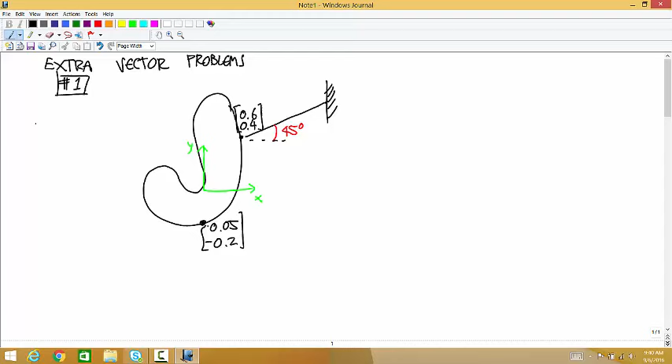And the first question is, if the cable has a tension T, what's the force vector the cable applies to the body? So what's the force vector applied to the body by the cable if the cable tension is T?

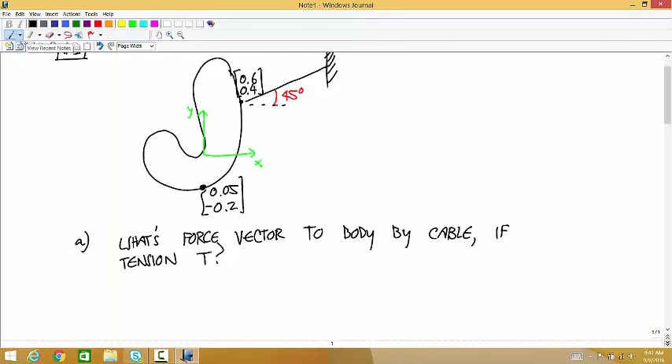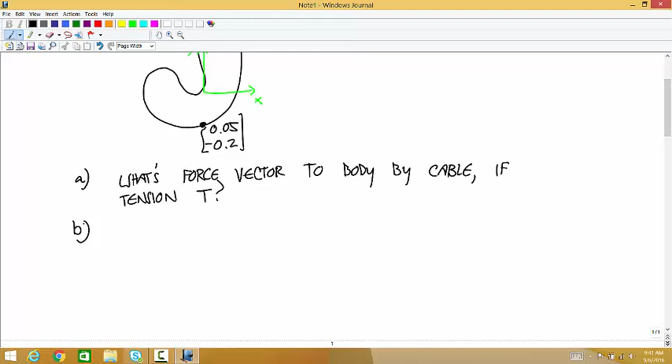And then the second one, well, the second one is the vector from the pin to the point where the cable connects to the wall. So I'll call this point W, I'll call this point P. And we want to figure out the vector to W from P.

To figure out the force vector applied to the body by the cable, we know the tension is T, so we're going to multiply that tension T by a unit vector in this direction. The only thing we don't have is a unit vector pointing away from the body at 45 degrees from the horizontal.

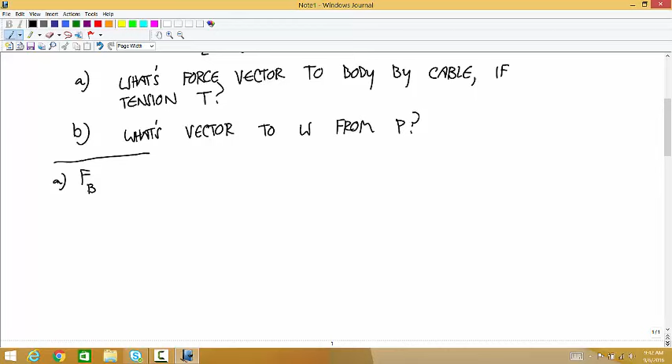So for part A, the force applied to the body by the cable is equal to T times cosine of 45, sine of 45. That's 0.7071, so this just gives you 0.7071 T, 0.7071 T. Any questions about the first part?

And then the second part, we want to figure out a vector that goes from P to W. So we're trying to figure out... I have a question. Yep, sure. Is there a reason why you didn't use the 0.5 meters in your calculation?

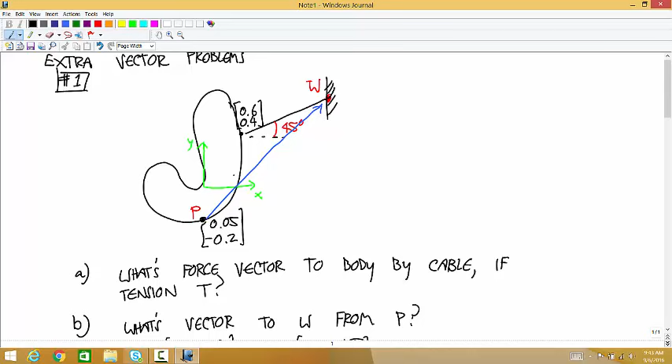We're going to use it in the second part, but what we wanted to do was, the only reason that cable was useful at all in part A was we know that the force applied by the cable is parallel to the cable, pointed away from the body. So we know we want a unit vector that's parallel to that cable, pointed away from the body. And so that half doesn't come into calculating a unit vector. That could have been any length.

And what you could have done, the long way around, if you hadn't seen that from the start, you could have said, okay, the vector from here to here is 0.5 times cosine and sine of 45, and then take the unit vector of that, and you realize, oh, I just divided that 0.5 back out. Okay, well, so that works fine too.

Okay, so for part B, we want this blue vector. So we have the coordinates for P. We need the coordinates for W.

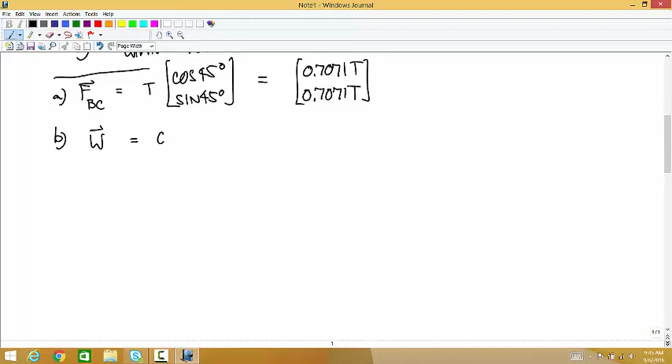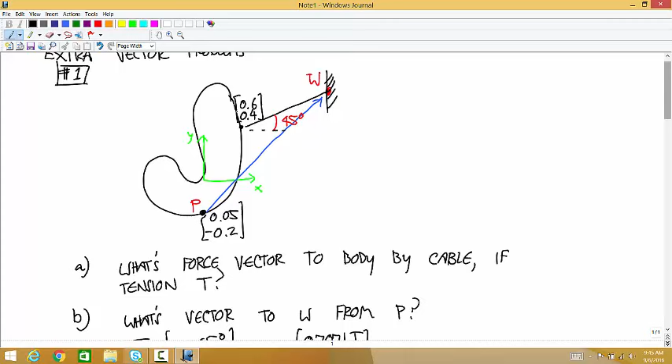So the coordinates for W are equal to 0.5 times cosine and sine of 45 degrees, plus the coordinates of this point, 0.6, 0.4. Okay, let me draw what's going on there.

So if we're trying to come up with the coordinates of W, okay, that's the orange vector. The way we're going to do that is we're going to add a vector that goes from the origin to here to a vector that goes from here to the wall. The vector that goes from the origin to this point is already given, that's 0.6, 0.4. And so now we just need to figure out that remaining black vector.

I guess I'll draw that as purple too, and then we're just going to add those two together. It's just vector addition.

So this is 0.3535, 0.3535, plus 0.6, 0.4, is 0.9535, 0.7535.

Would you have to have a distance from P to the origin too? From P to the origin, we already have that given as coordinates, so we don't have to figure that out.

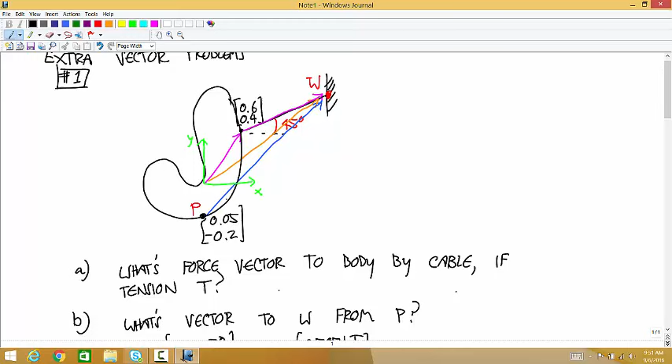Guillermo, you have a question? Mm-hmm. Okay. Well, okay.

This one is pretty hard to draw. Let's see, why don't I insert it here?

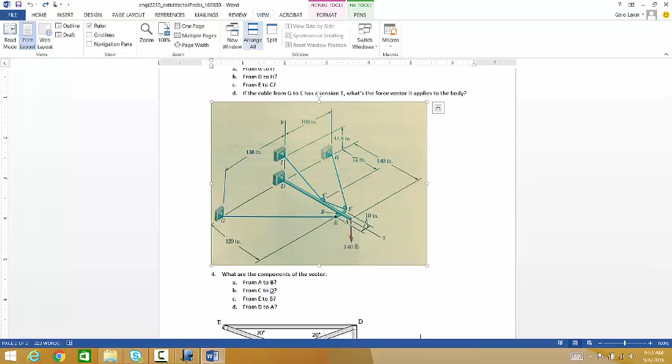Okay, well, let me just do it on the - let's look at it up here. All right, so we have the x-axis going this way. Oh, no, we don't. Okay, start over again. We have the x-axis going this way.

And the y-axis, that axis, comes all the way back to there. That's the origin, with the y-axis going this way. And the z-axis is going this way.

For each one of these points, I think the easiest way to do it is to start out by figuring out the coordinates of all these points, and then you can do the subtractions. Let's just figure out a couple of these since we're here.

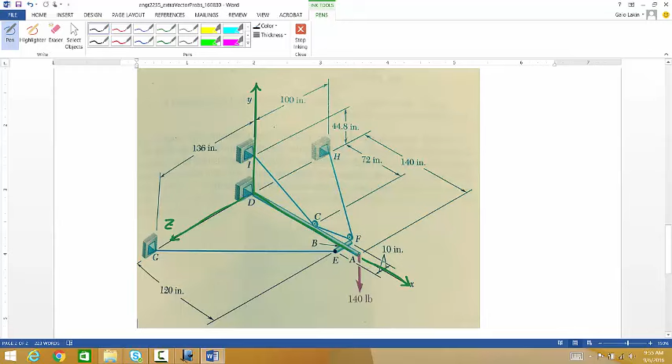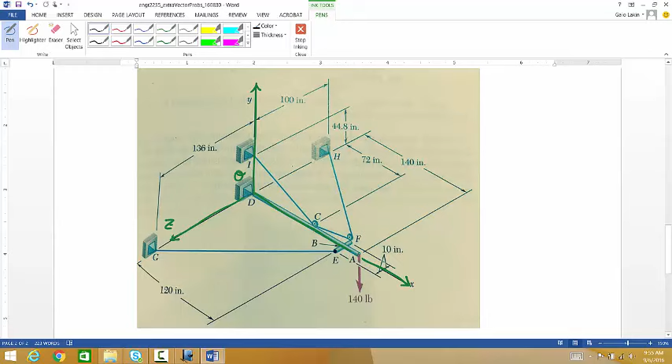So the coordinates of H. H is just, so if this is the origin at D, to get to H you just go a total of 100 inches in the negative z direction. So the coordinates here are 0, 0, negative 100. This is in inches.

For that point I, to get there, you're just going from the origin 44.8 inches in the positive y direction. So 0, 44.8, 0. Any questions about either of those?

G is just in the positive z direction, a total of, well I covered it up, but I think that says 136 inches. So that's 0, 0, 136.

Let's do, so these are all just going along a single axis, but now we have to do a couple where you're going along multiple axes. So let's say the point F. To get to F, you travel from the origin along the positive x-axis until you get to B. And then from B, you have to go 10 inches in the negative z direction to get there.

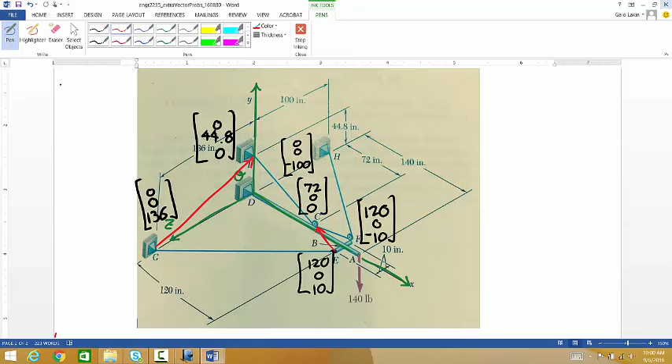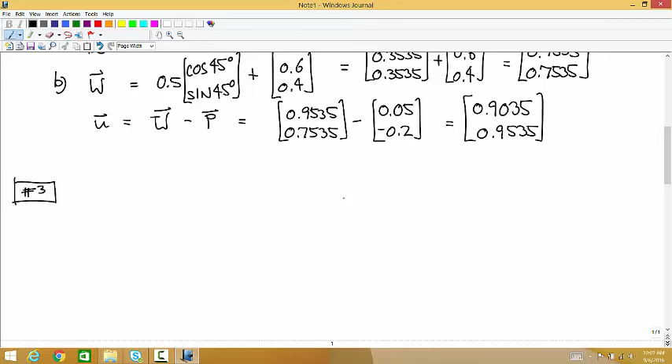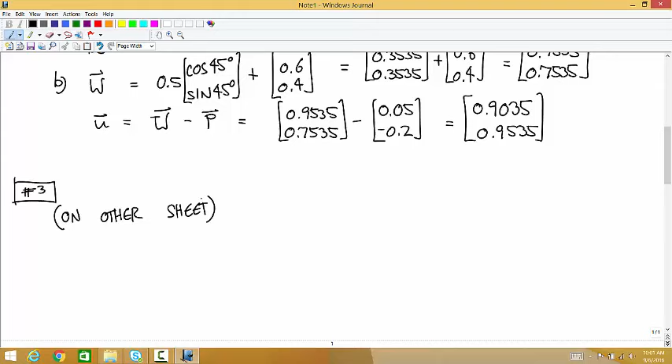Okay. All right. So I was going to do an example problem.

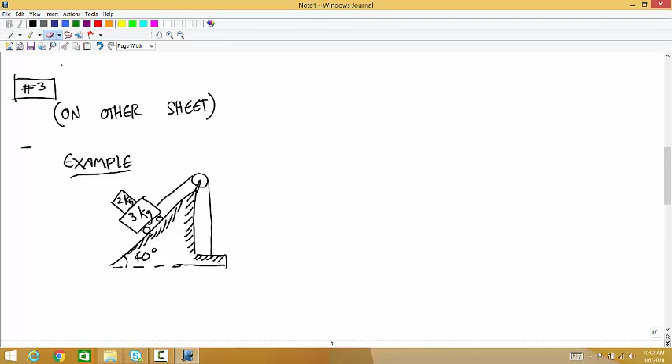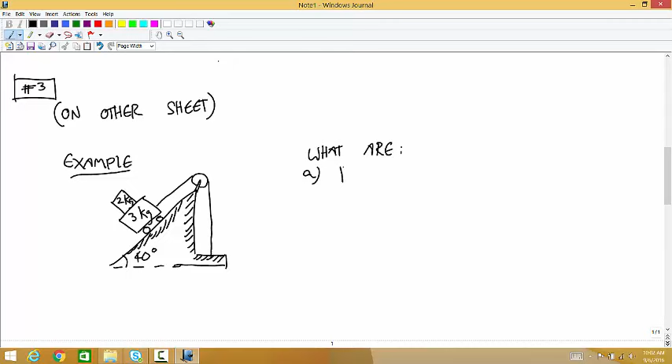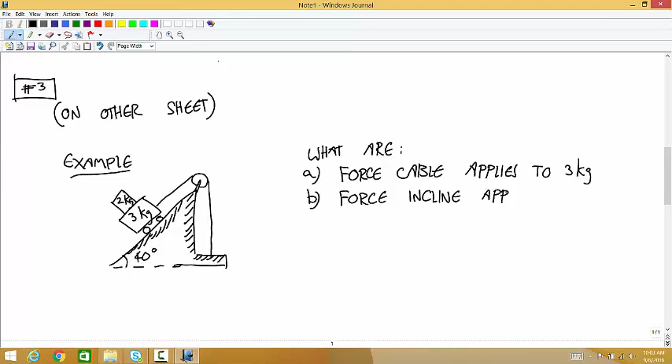And we want to figure out, I don't remember what order I said before, but let's say the force the cable applies to the 3 kilogram box, the force the incline applies to the 3 kilogram box, and the force the 3 kilogram applies to the 2 kilogram.

We're going to have to isolate two bodies. You kind of have a choice. You could isolate the two of them together, or you could isolate the two of them together and then isolate one of the individual ones, or the two individual ones. But either way, you're going to have to use Newton's second law twice. Let's just isolate the two boxes.

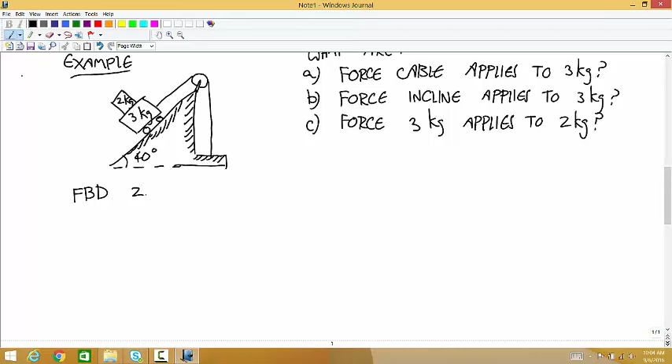So, free body diagram of the 2 kilogram box. There's the outline, then there's the weight force of 2 times 9.81, and then this is a friction contact. So the only place that the outside world makes contact with the 2 kilogram box is here. That's the force on 2 by 3.

And Newton's second law says 0, negative 19.62, plus F23x, F23y is equal to zero, because there's no acceleration. And so the force on 2 by 3 as a vector is 0 for an x component and positive 19.62 for a y component.

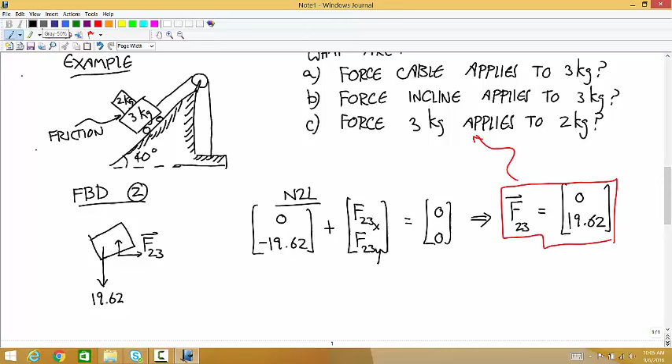And actually, that's already part C. And then we'll isolate the 3 kilogram box.

There's the outline. There's the weight of 3 times 9.81, so 29.43.

Now we're just going around the boundary looking for contact. I'll start at the wheels. What do we know about the nature of the contact between the wheels and the ground? It's frictionless, so that's a pushing contact. It's perpendicular to the surface toward the chosen body, or it's just a normal force, like you've done before. I'll just call that N.

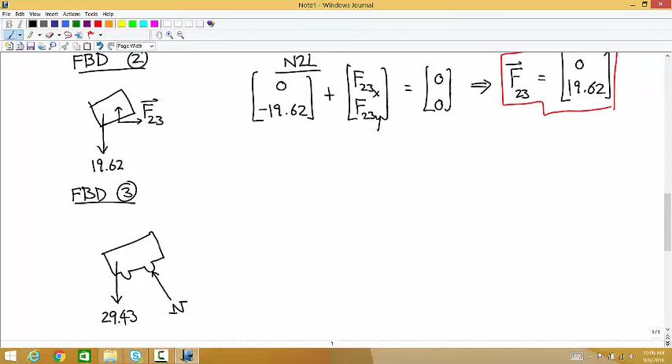Keep going around counterclockwise. We get to the contact between the body and the cable. What do we know about the nature of that contact? Yep, parallel to the cable, away from the body, like that.

Then we get to the top. The top touches the 2 kilogram box. What do we know about the nature of that? Yeah, that's right. That's the force on 2 by 3, which is negative F32. Actually, no, what I wrote here is wrong. This is the force on 3 by 2. It's negative F23. And we already calculated F23, so this is equal to 0, negative 19.62.

Why is the force pushing up if the force on 3 by 2 -- why is it going up instead of downward? Why did I draw it like that? I just drew that to say, when I draw it like that, all I'm saying is the sign convention says a positive x component means that way, and a positive y component means that way. And then the value of the y component is negative, which means that really that force is acting down. So that's just showing a sign convention.

But that's important, because if you instead drew this as going down, and then wrote this is 19.62, that would be saying you have a unit vector down times a constant of negative, which would be a double negative, and you'd really be saying the opposite of what you mean. So your forces go in as vectors -- you always need your unit directions to be in the directions of the axes. When you know the directions of those components, don't use that to adjust the directions of those axes.

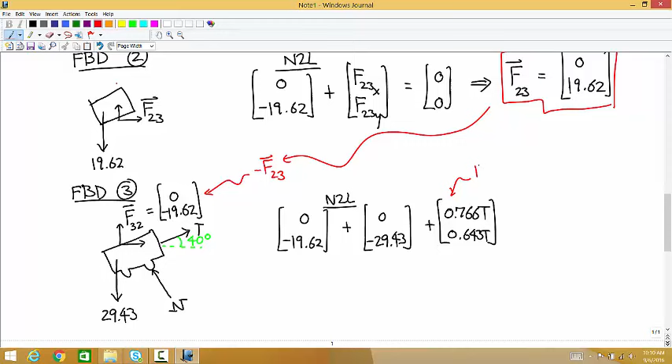plus, now we have to do some stuff with unit vectors. So what do we know about these directions? Well, this one is probably the easier one to see. This is just an angle of 40 degrees. So this force is going to have a magnitude of t times cosine and sine of 40, which is 0.766 t, 0.643 t. So cosine 40 t, yep, that's right. This is t times cosine of 40, sine of 40.

And now we have to figure out the angle for n. I think the easiest way to do that is to think of n as just being perpendicular to t. So I'm going to just take the tail of this vector n, tail of this one, and then imagine my coordinate system in there like that. So we go plus 40 to get to t, and then we go another plus 90 to get to n. So 40 plus 90, 130. And so this is going to be n times cosine of 130, which is negative 0.643 n, positive 0.766 n.

Okay, and this one comes from n times cosine and sine of 130. And that's everything.

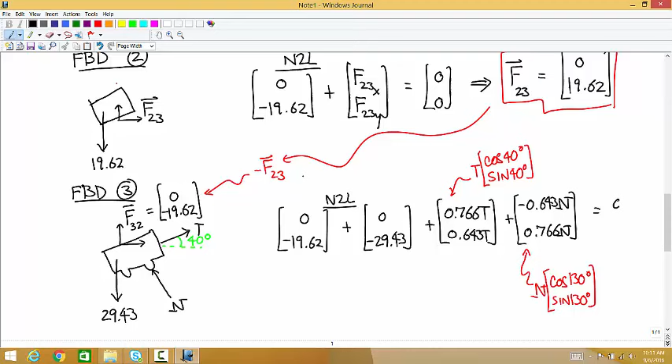So this gives you two equations. The first one says 0.766 t minus 0.643 n is equal to 0. And the second one says 0.643 t plus 0.766 n is equal to -- what's that, 4... Oh yeah, right, 49.05. Okay, so that's a system of equations we need to solve.

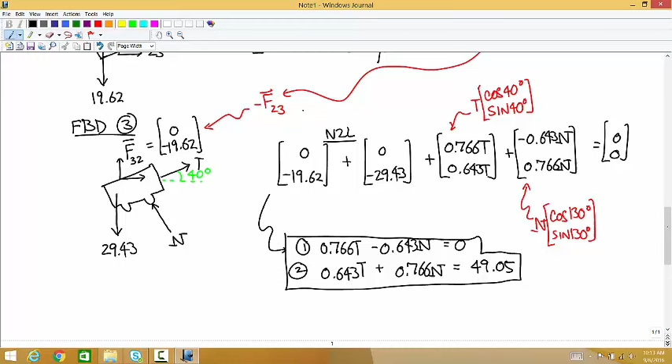So how do we solve that system? Well, that's a small system -- it's two equations for two variables. There's a million ways you could do it, substitution or whatever. But systems of equations are going to be a big thing in this class, and sometimes the systems are going to be as big as 20 by 20 or so. And if you have 20 by 20, then substitution is kind of out of the question -- you're just not going to do that. So the way to do this...

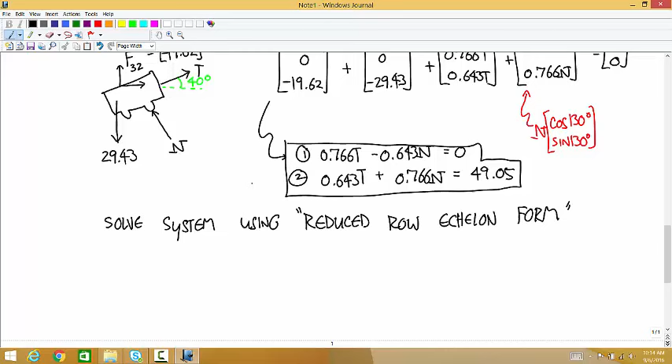So we're going to solve this system using reduced row echelon form. You either have taken a class where you had to learn how this works, or you will take a class where you have to learn how this works. Me too, but I have no idea anymore how it works. I just plug it into a calculator, and that's all you have to do in this class.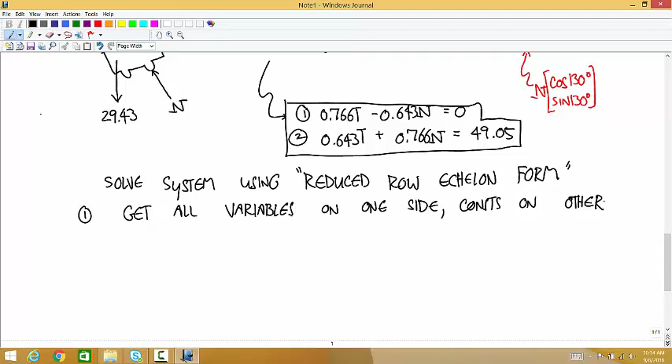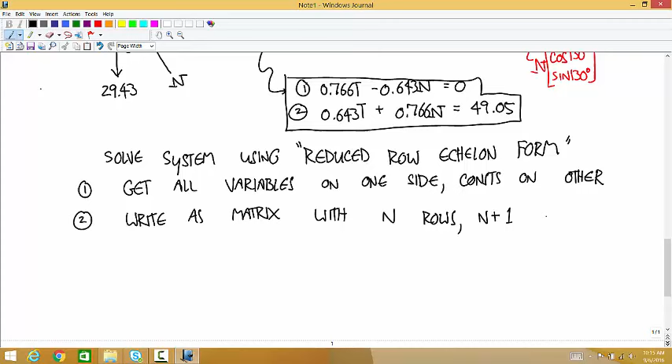So the way to do that is, first, get all variables on one side of the equation and all constants on the other side. And I did that. Second, write it in the form of a matrix with n rows, n being the number of equations, and n plus 1 columns. And so in our case, it's going to look like this.

Okay, so we have a system of two equations and two variables. Our first equation is this row, our second equation is this row. Our columns represent the variables: the first represents t, the second represents n, and the third represents the constants.

Now we're going to go through those equations and write down the coefficient for each variable in the appropriate box. What's the coefficient for t in equation 1? 0.766 for n, negative 0.643, constant 0. For equation 2, the coefficient for t is 0.643, for n is 0.766, and the constant is 49.05.

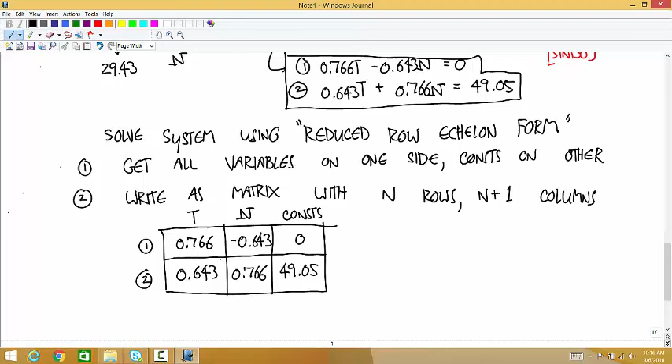Your different calculators have different ways of entering this matrix, so if you can't remember how to do that, figure it out or come talk to me and we'll get it programmed in. Once you have that programmed in, you're just going to run the function. Let's say you call this matrix M. Now you're going to run the function RREF on M.

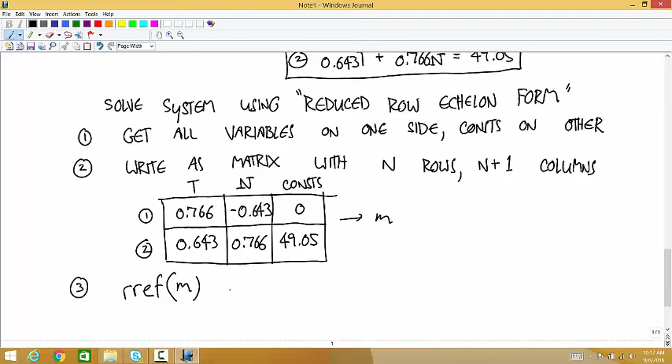It is going to give you a matrix out that has the identity matrix in the first two elements of each row. Then the third column is going to give you the answers in the order that you have the variables. So this answer is going to be the answer for t, and this one's going to be the answer for n.

Can someone punch that in and give me those two values? 37.57? Okay, so that's your answer for t, and that's your answer for n. It didn't save really any time to do it that way for two variables, but when we get to 4 or more, it'll save a lot of time. And when we get to 20, it'll save you a day.

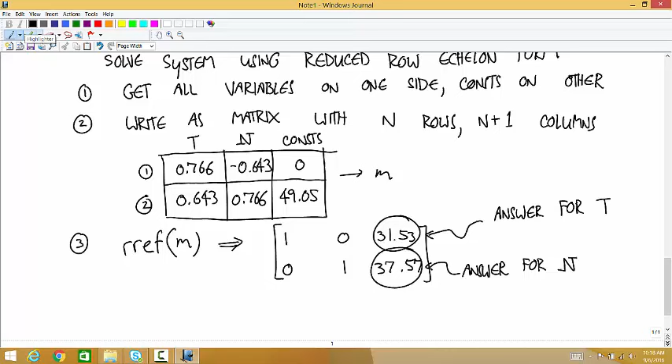Okay, well we solved the system, but we haven't actually answered the question yet. The question asked for the force, meaning the force vector the cable applies to the 3 kilogram cart. So how are we going to get that? Well, this vector here in Newton's second law is the force vector applied to 3 by the cable, and this vector is the force on 3 by the incline. So all we have to do now that we know the values for t and n is plug them back into these vectors, and it'll give us those force vectors.

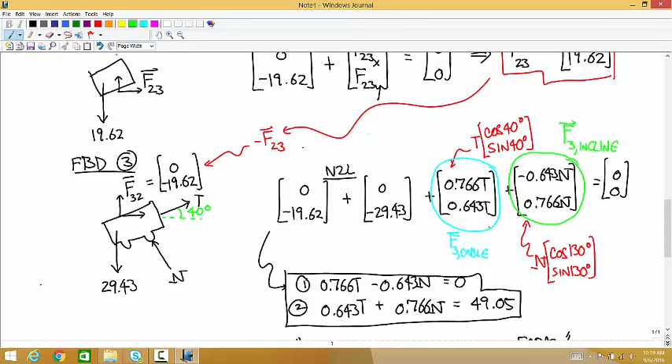So the force on 3 by the cable is equal to 0.766 t, 0.643 t. Can someone multiply 31.53 times 0.766 and 0.643? 24.152? Okay, and 20.273. So that's the force vector applied to 3 by the cable.

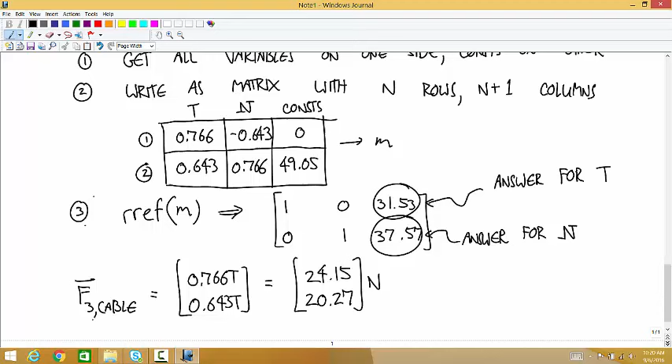And then for the normal, the force on 3 by the incline, that was equal to negative 0.643 n, positive 0.766 n, right? I think so. Yes. So now multiply that unit vector by n, and what do you get? Negative 24.16, and 28.78.

Okay, so if this problem had asked for the cable tension, you just give that value T. If it asks for the force, it should specify. If it asks for the force vector applied to 3 by the cable, you have to plug that tension back into the force vector to get the components. Same thing with the normal force. If it had just asked for the magnitude of the normal force, the answer would be n, but if it asks for the force vector, you have to plug it back in.

What's the force applied to the cable by box 3? Yeah, the negative of that, because it's Newton's third law. So it would be negative 24.15, negative 20.27. And what's the force on the incline by box 3? If you work for an incline company and you're trying to figure out if your incline's going to break, you need to use the higher quality wicker or whatever on your incline. Again, you just take the negative because it's Newton's third law, so the force on the incline by 3 would be positive 24.16, negative 28.78.

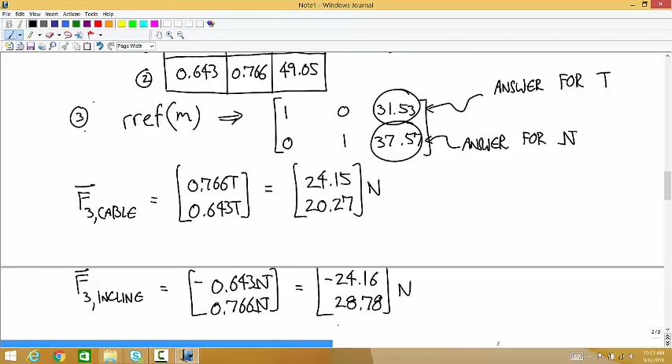So now I'm going to do another example. This one's pretty similar to something you had to do, or will have to do, in your homework. This one has to do with pulley advantage. Some of you heard about this in Physics 1, some didn't, but I'm sure everyone's heard that pulleys are one of the simple machines. So you can use pulleys to decrease the amount of force it takes to lift something. But the first time I saw calculations with pulleys, I was confused, because the pulley doesn't actually reduce the force required, it just changes the direction of the cable force, right? That's all a pulley does. But it turns out that if you use a certain configuration, you can get this pulley advantage effect, and I just want to show how that works.

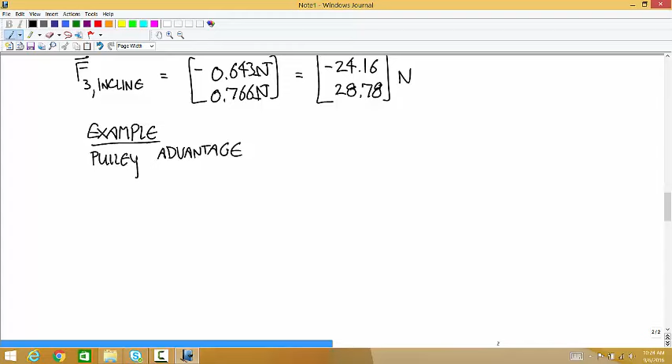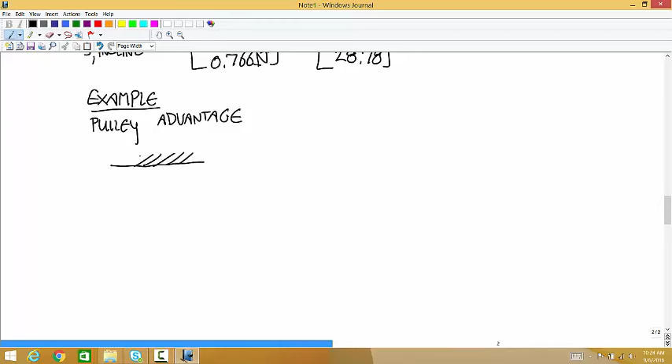So let's say that we have, here's the ceiling, and we have a pulley attached to the ceiling.

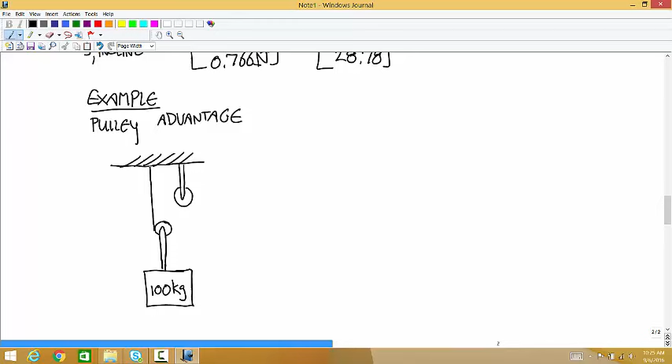And then we have, you can think of it as like a hanging pulley that's attached to a mass, 100 kilograms. And the system is held together by a single cable that attaches to the ceiling here, goes over this pulley, then over this pulley, and then back down there.

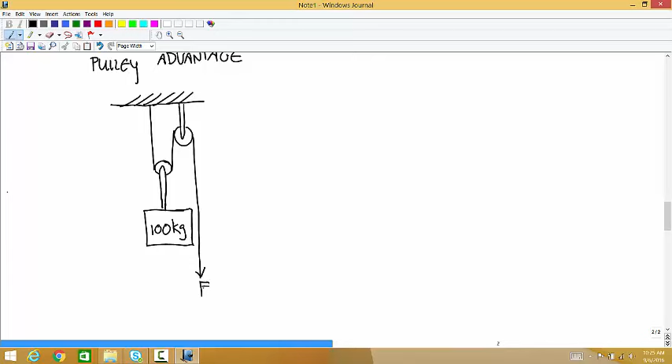The idea is these should all be vertical. What's the force F that's required to keep this mass at rest.

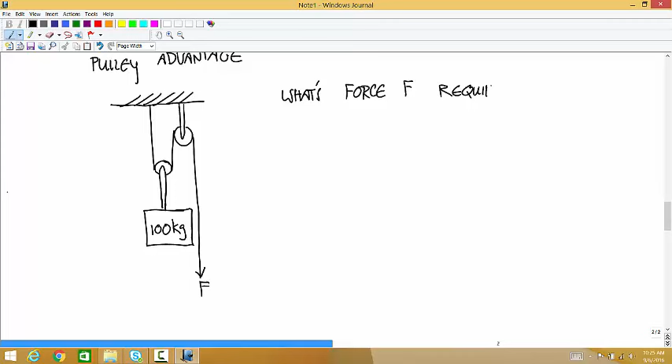Well, if we didn't have this hanging pulley here, I should have drawn this the simple way first. But imagine that this 100-kilogram mass was just attached to a cable that went over that pulley, the simplest configuration you could have. And you had to apply a force F to lift this thing up, which has a weight of 981 newtons.

That force F would have to be 981 newtons down to hold that up. That should be negative, right? Well, the direction is given by the arrow.

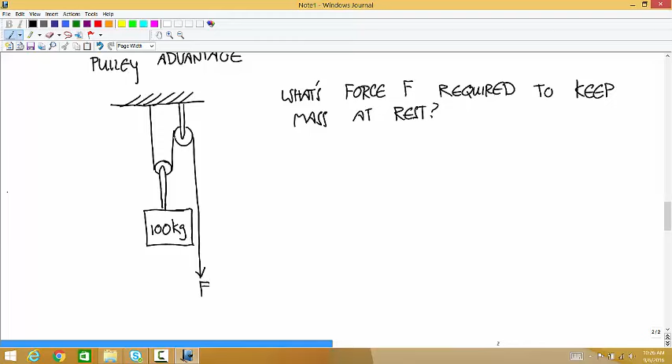So let's say we just have this 100-kilogram mass and one pulley and a force F. What's the F required for equilibrium?

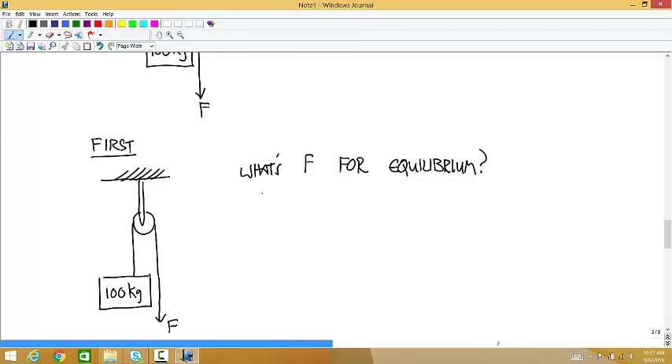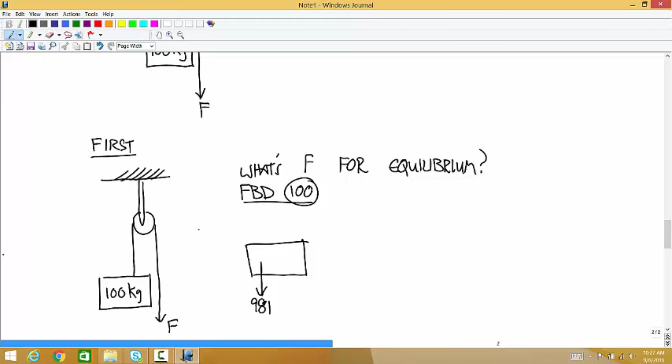A free body diagram of the mass has 100 times 9.81 acting down, that's the weight. And because this cable is weightless and this pulley is massless and frictionless, we have an upward force of F. And then Newton's second law, we'll use that to calculate F.

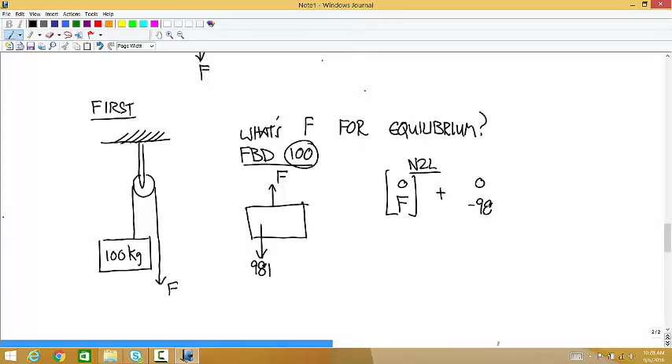So 0, F, because it's in the positive y direction, plus negative 981 is equal to zero, and F is equal to 981. So we had to apply a force that was equal to the weight.

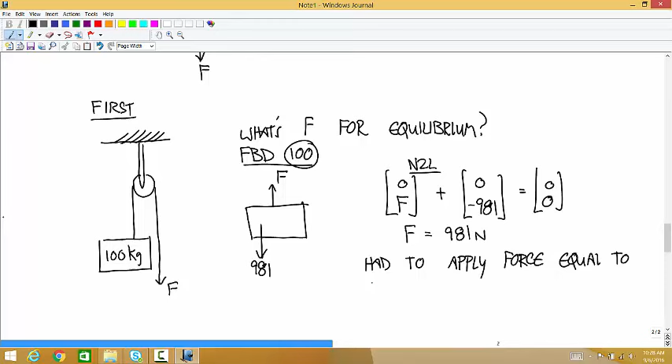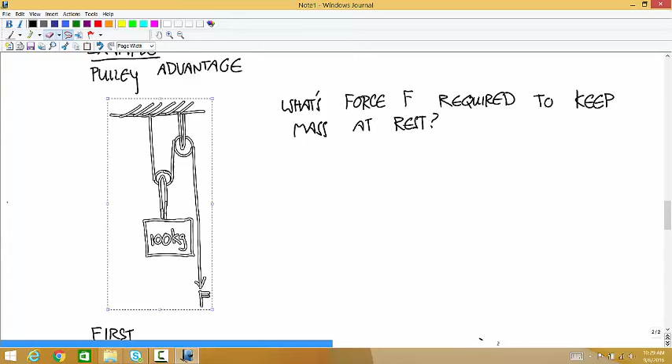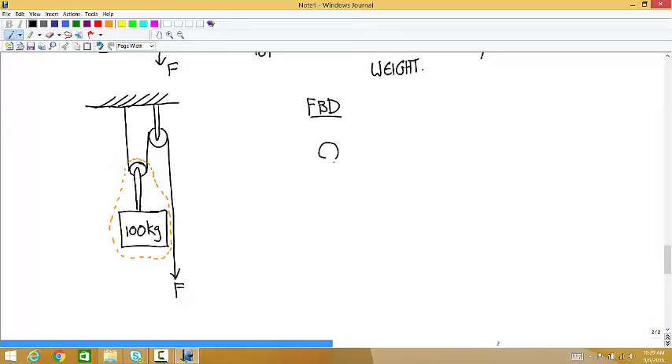So now let's go back to this one. And what I'm going to isolate is the mass and the hanging pulley, everything that's hanging. So a free body diagram looks like this: there's the pulley, there's the mass.

So what forces are acting? There's a downward force of 981. And now, drive around the boundary until you get to contact. And the first place you get contact is here.

If you think this looks ridiculous, you don't have to do it, but I think sometimes on complicated cable problems it helps to just include a little tiny bit of the cable in your isolated body, and then the direction of the force is always right out of the little stump of cable. So we have a force T there.

And now keep going around and you get to the other place where the cable contacts the pulley. So I'll include a little stump of cable over there. And since it's the same cable going over massless, frictionless pulleys, that has to be the same cable tension.

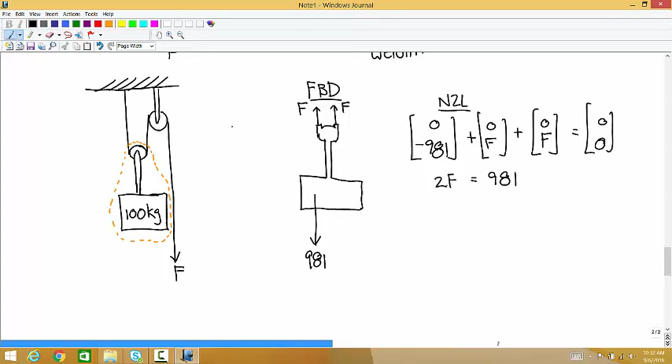I'm sorry, change these to F, we already named that F. So F on each of those, F in Newton's second law on each of those vectors. And so F is equal to 490.5.

And that's pulley advantage. You can lift a 981 newton force by only applying 490.5 newtons. And I think probably, if you're like me the first time you see this, your first thought is that it looks like sort of a trick, like find the place where I did something I'm not allowed to do. But it's not. That's actually how it works.

And if you ever come to office hours in 1324, on Monday or Wednesday, we can rig up a pulley and you can see how it works. You can feel the weight go down that's required because you're using 2 times the cable tension to lift this.

Would you still have the same effect, although to a lesser effect, if that hanging pulley had mass? Yes, you would, just depending how much mass and how much friction. You're right that friction, weight of the cable, mass of the pulley, those all just diminish it, and eventually you get to a point where if those are high enough, you don't get any advantage.

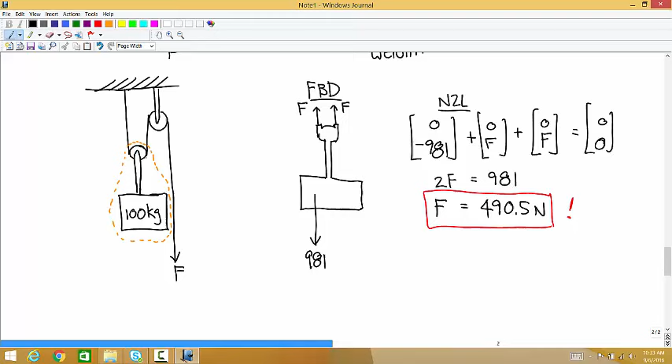So now, how about this?

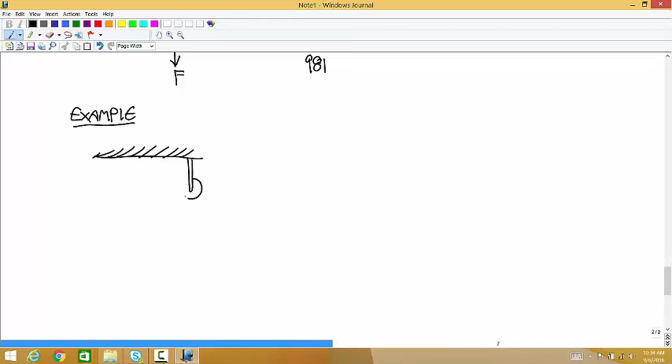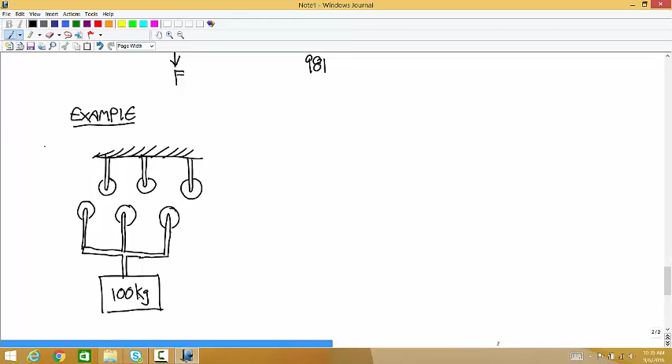So now we have this pulley attached to the ceiling. That's a hanging pulley. Then we have another pulley attached to the ceiling, another hanging pulley. Another pulley attached to the ceiling, one more hanging pulley. These three hanging pulleys share the weight of, say, 100 kilogram mass, and a cable strings through like this.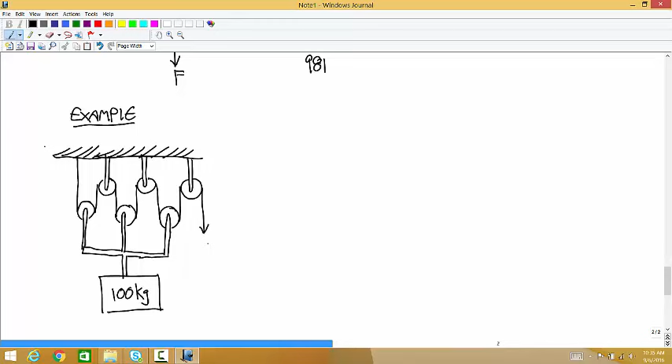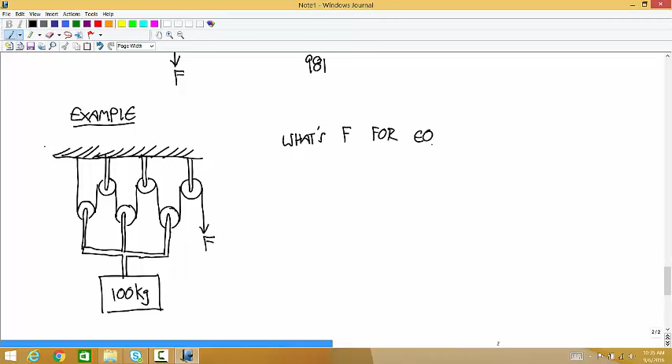What's F for equilibrium? So this time we're going to isolate, again, just isolate everything that's hanging. And so the free body diagram looks like this.

We have the weight of 981. Each pulley contacts the outside world in 2 places.

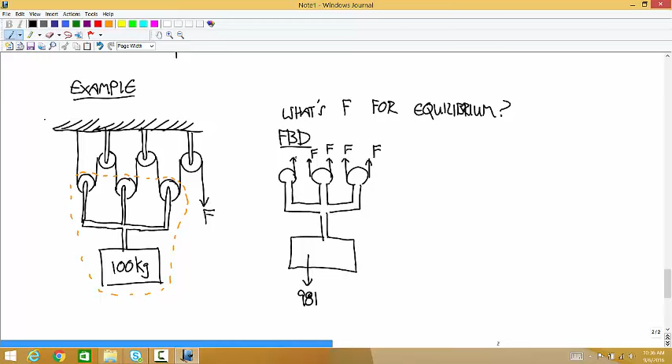And so Newton's second law says... let me do it carefully. So 0F plus 0F plus 0F plus 0F, two more times, 0F, 0F, plus 0, negative 981, is equal to zero. And so you get that F is equal to 981 divided by 6.

And what's that? 163 point what, 5. And anywhere they have to move big shipping crates around, they use this idea. The pulleys aren't laid out in this way, they're laid out in a way that saves space, but this is the principle behind it. Block and tackle systems.

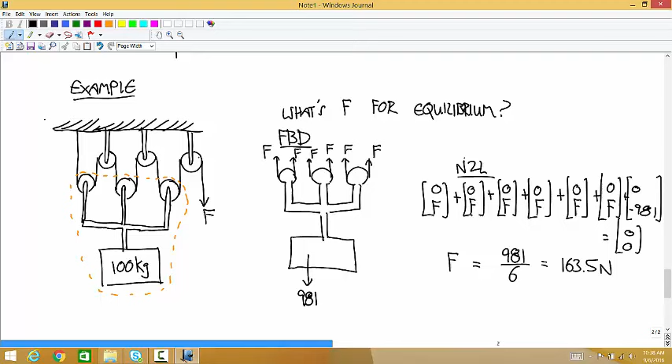And I want to do one more thing. So 1/6 of the force is used by the person pulling the cable to hold it upright. That means 5/6 of the force is coming from the ceiling. That's right, yep.

And if it occurs to you that this seems like it might violate conservation of energy in some way, the thing that keeps it from violating conservation of energy is that in this last example we have this really small force to hold up a big weight. But if you wanted to lift that 100 kilogram mass up a foot, you'd have to pull that cable through the pulleys 6 feet.

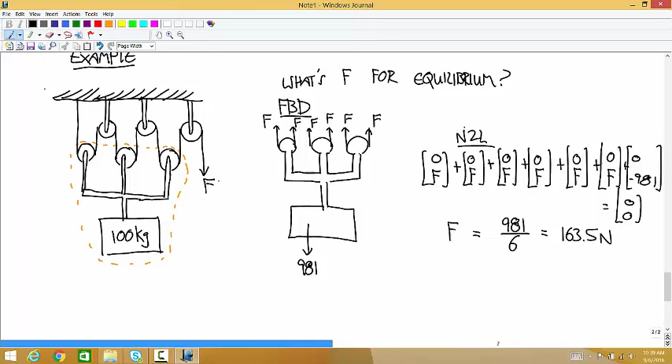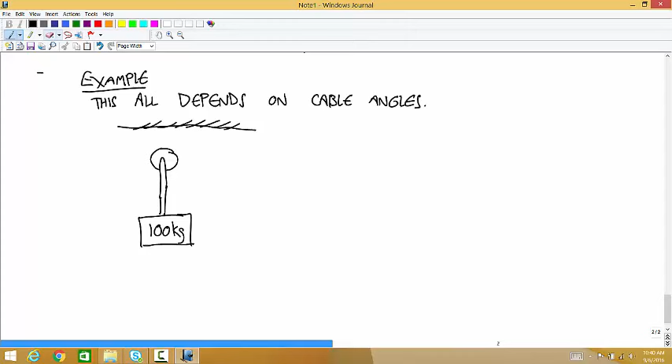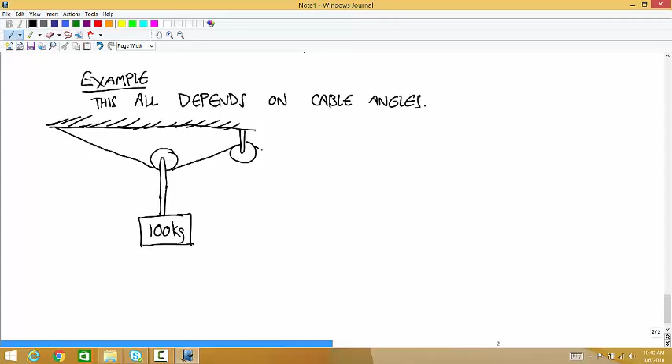The idea of this is it all depends on the angle made by the cable. So let's do this again. This time, let's say we have the hanging cable attached to a 100 kilogram mass, and that's the pulley attached to the ceiling. But this time we have these very horizontal cables. Let's say all these angles are 10 degrees. And we want to calculate F for equilibrium.

I'm going to draw a free body diagram of the same thing as before, everything that's hanging. So we have the weight acting down, 981. And now we have force vectors. Those are always parallel to the cable, so we have one that way and one that way.

And so Newton's second law says we have F times cosine and sine of, what's the angle representing this direction? 170, yep. And this one? 10, yep. So we have F times the cosine and sine of 170, plus F times the cosine and sine of 10, plus 0, negative 981, is equal to zero.

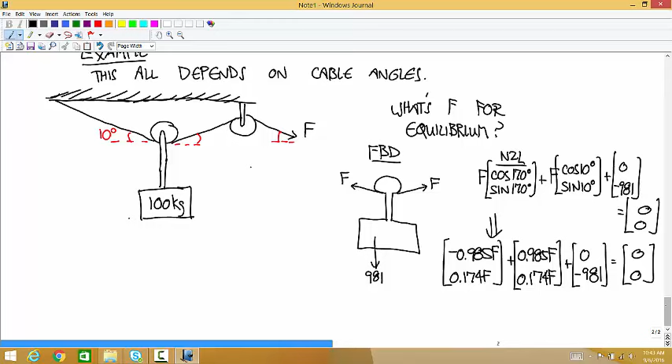The x components cancel, so you get one equation that says 0 equals 0. That doesn't do you any good. But the second equation says, what's that, 0.348? 0.348 F is equal to 981. And so what do you get for F? 2818.97. Okay. The 0.348? I added up, I have two times that I have 0.174 F, so I just added those up.

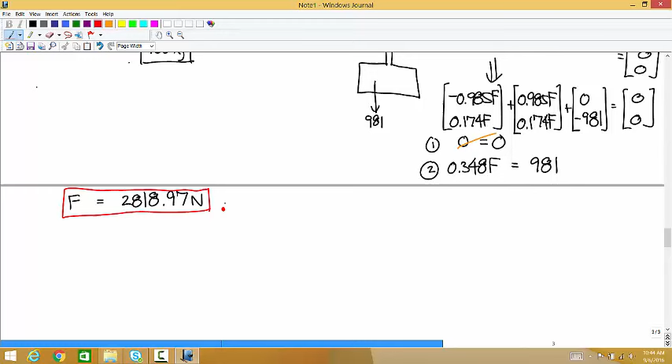Well, yeah, but did the force increase? Yeah, so no advantage at all. In fact, things got worse with that system. And that all happened because of this angle, because the component of the force vector in the vertical direction was very small. And as that vertical component gets smaller, your advantage gets worse and worse. And it actually approaches infinity. It never stops getting worse.

So if you imagine the cable tension as this angle approaches 0 degrees, as it approaches perfectly horizontal, that cable tension is going to infinity. So if you ever have to rig up a system like this and you think, I'm going to save some space by making the cable more horizontal or whatever, that's not good. That won't happen.

Any other questions about that? So if we go farther, I mean smaller in the y direction, the force will be increased. Right, exactly.